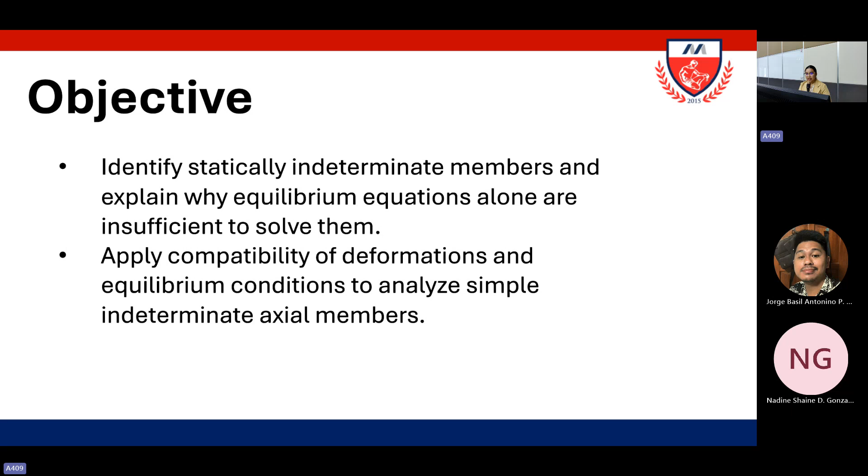So ma'am, what is a statically indeterminate member? When the reactive forces or the internal resisting forces over a cross-section exceed the number of independent equations of equilibrium, the structure is called statically indeterminate. These cases require the use of additional relations that depend on the elastic deformations in the members.

Usually, most commonly, you will know if it's a statically indeterminate member if you have two materials in your body. In our previous lessons, we only analyzed one material, right? For example, in one of our examples, we analyzed a steel rod. What material was used there? It is pure steel. In other examples, you can also analyze using pure cast iron.

For example, we have here a steel rod, and this is applied to a load P. What is the reaction of our material? It will resist the applied load. So if this is the applied load, how will our material resist it?

For example, let's cut here to reveal the internal force. If you have a compressive load P, how will the material resist it? If this is a downward force, what force should be here so that it will be in equilibrium? Upward force, right? And since this is just one material, meaning only one force will resist it.

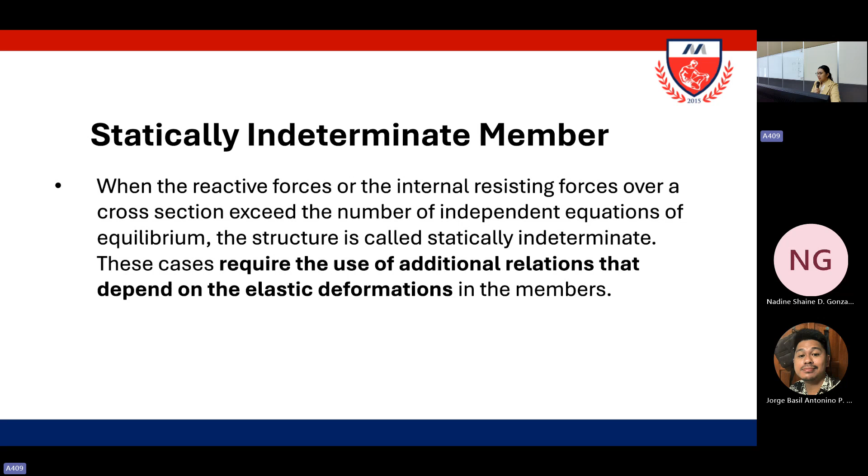And when you have a statically indeterminate member, usually you use equations based on their elastic deformation. So to better understand this, we will go through our example right away.

Example 1: a steel bar 50 mm in diameter and 2 meters long is surrounded by a shell of cast iron 5 mm thick. So this is our steel bar that is 50 mm in diameter and 2 meters long — when you convert 2 meters into mm, that would be 2,000 mm. It is surrounded by a shell of cast iron 5 mm thick, so the covering is made of cast iron, and the inside of the cylinder is made of steel. Compute the load that will compress the combined bar a total of 0.8 mm in a length of 2 meters. For steel, E equals 200 GPa, and for cast iron, E equals 100 GPa.

So what is our E? The modulus of elasticity, correct?

So, what are our given values?

First, why is this a statically indeterminate member? Because it's a composite axial member, meaning may dalawang materials, a steel core inside a cast iron tube carrying one load P, it is a statically indeterminate member. So the unknown internal forces are the load shares in each material, the force from the steel, and the force from the cast iron. So bale yung applied force mo na P, yung nasa taas, paghahatian yan ng ating steel tsaka ng ating cast iron. Nagets ba yon?

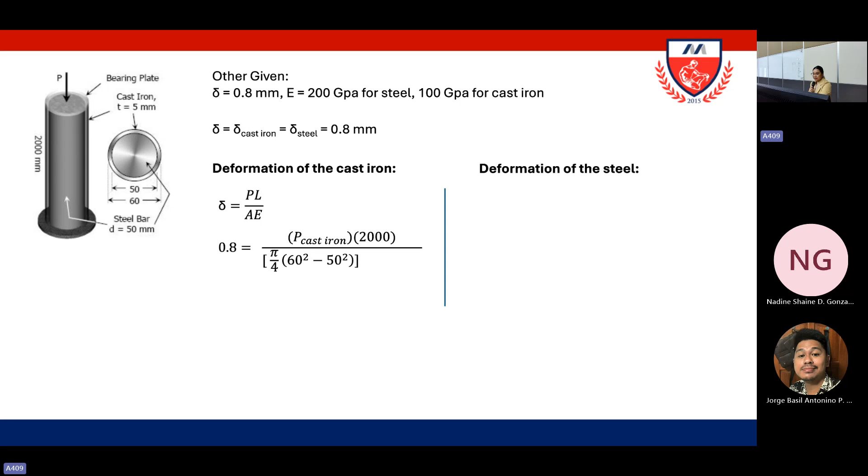And our area of the cast iron, that is pi over 4 times 60 squared minus 50 squared. So ma'am, bakit ganyan yung area natin? Sulat ko sa board, okay?

Yung shell natin is cast iron, tapos ito is steel. Yung outer diameter mo daw is 60, tapos yung inner diameter is 50. Can you still recall what is the formula of area of a circle?

Pi over 4 d squared. Yung cast iron natin, yung nasa labas. So can we say that the area of our cast iron is pi over 4 times 60 squared? No. Kasi kapag ito yung ginamit mo, meaning ang area niyan is itong buong circle. Gets ba? So ano lang ba yung cast iron natin? Ito lang, itong area na to, right?

Therefore, yung gawin natin is dapat yung area ng buong circle minus yung area ng smaller circle, which is yung steel. So that would be yung area ng ating cast iron. Ano yung area ng ating buong circle? That is pi over 4 times 60 squared. Minus, ano yung area ng ating smaller circle or yung area ng steel? Pi over 4 times 50 squared. So dyan galing yung area natin.

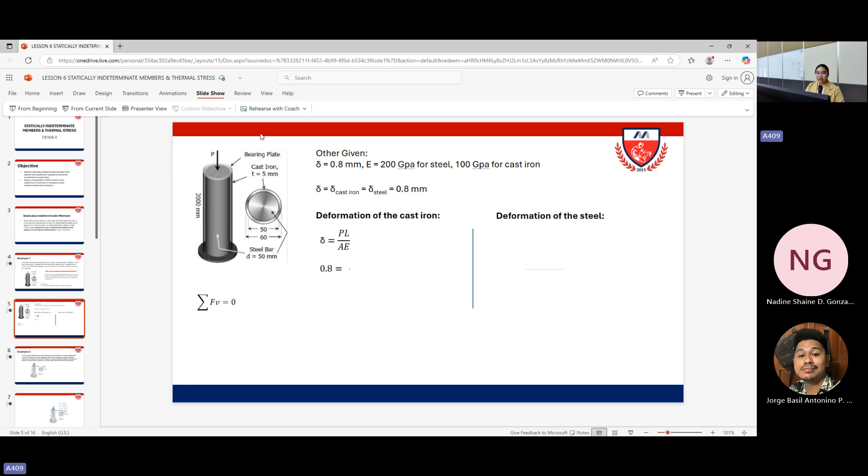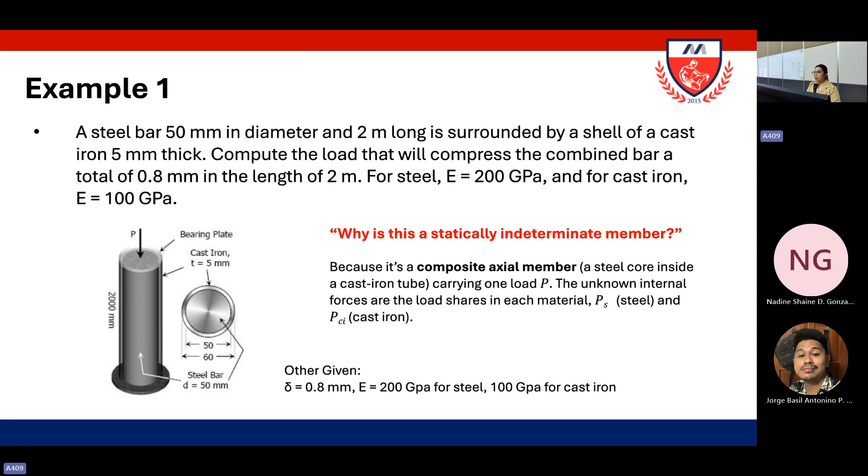Ano nga ulit yung hinahanap natin sa problem? That is... pakita ko na lang yung first slide ha, tapos picturean niyo na lang. Yung hinahanap is compute the load that will compress the combined bar. So yung hinahanap is yung total force.

So if may force na tayo ng cast iron, tsaka may force na tayo ng steel, paano natin makukuha yung ating total force? Based from the concept na pinaghahatian ng cast iron tsaka steel yung inyong force P, we can do summation of forces vertical.

So, meron tayong force P na pababa. And then, meron tayong pataas na force ng cast iron, tsaka pataas rin na force ng steel. Bakit na pataas? Kasi kailangan niyang i-resist yung pababa na force. So if you have P, so meaning that would be P equals to the force of the cast iron plus the force of the steel.

So ilan yon? You just substitute. You have 11,000 pi plus 50,000 pi, or you will get 61,000 pi newtons. And if convert nyo into decimal form, that would be 191.64 kilonewtons. Na-try niyo ba sa calculator?

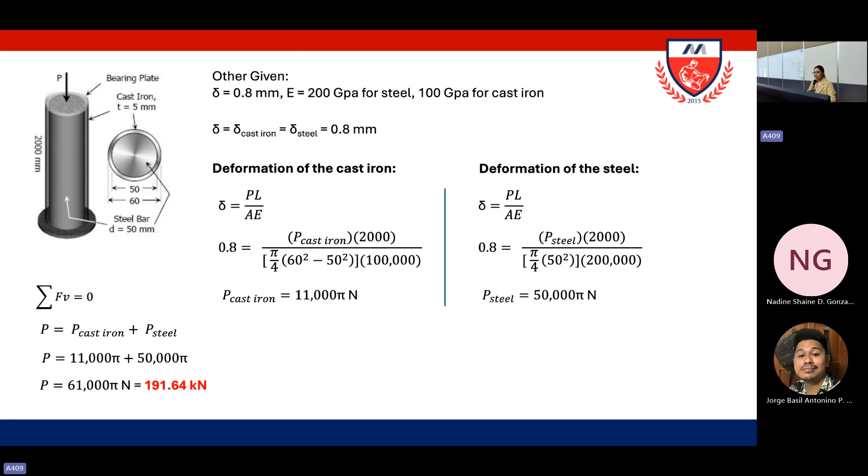So if there are no questions, let's proceed to the next example. Example 2, a steel cylinder with 300 mm outside diameter and wall thickness of 20 mm.

Yung outside diameter natin is 300 mm. Tapos yung wall thickness, since ito yung wall ng ating cylinder, the thickness of that is 20 mm. It is filled with concrete.

So if it is filled with concrete, ano yung ating outside covering? It is made of steel. Tapos yung nasa loob is made of concrete. So is it a statically indeterminate member?

Yes, because it is a composite axial member. So it is used as a pier to support an axial load in compression. Ito yung ating axial load. It is in compression again because kino-compress niya yung ating material.

So if the allowable stresses are 140 MPa for steel and 12 MPa for concrete, and if the modulus of elasticity for steel is 200 GPa and for concrete is 19.2 GPa, what is the allowable load for the pier?

So ito lang yung hinahanap natin, yung force P. Ano ba yung forces again na magre-resist sa force P na ito? Meron tayo pataas, right? Ilang forces yung magre-resist na pataas? Dalawa. The other force is from the concrete and the other force is from the steel.

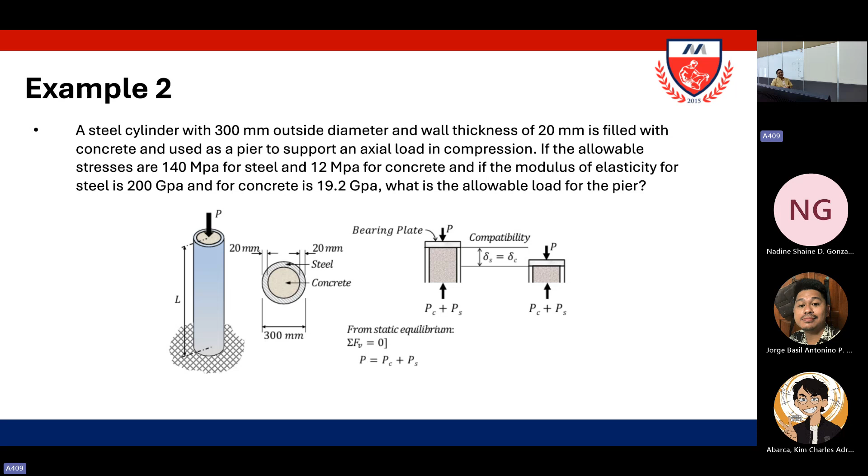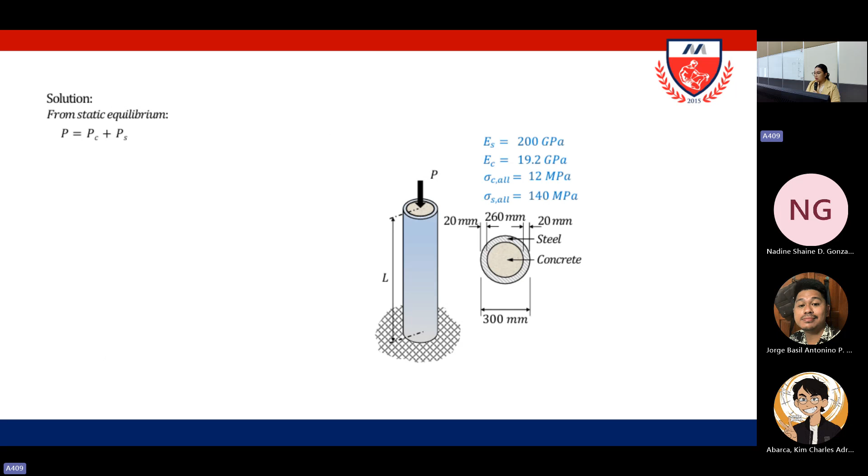Okay, so ito lang yung given natin kanina. Meron tayong modulus of elasticity ng steel tsaka ng concrete. Tapos yung allowable stress ng ating concrete is 12 MPa. And yung allowable stress ng ating steel is 140 MPa. So solution again is P equals PC plus PS. And then that would be stress times area.

I know it is confusing. Paano naging stress times area? Meron tayong PC plus. What is the formula of our stress? Stress is P over A. So if you derive mo from here, if we cross multiply mo yan, that would be P is equal to stress times area. Gets ba?

Therefore, if meron tayong force from the concrete, dapat stress times area yung force, di ba? Pero since this is force from the concrete, dapat yung stress natin is sa concrete and then yung area natin is sa concrete also. And if sa steel naman, dapat yung stress is from the steel and yung area is from the steel.

You take note of that, ha?

So let's solve for the area of the concrete. So that is pi over 4 times 260 squared. Ma'am, bakit 260? Bakit hindi 300? Kasi yung concrete natin is yung inner circle. Therefore, we use the inner diameter. That would be 53,092.92 mm squared. And yung area naman ng ating steel is pi over 4 times 300 squared minus 260 squared. That means yung total area ng inyong bigger circle, i-minus nyo lang sa area ng inyong inner circle. You will get 17,592.92.

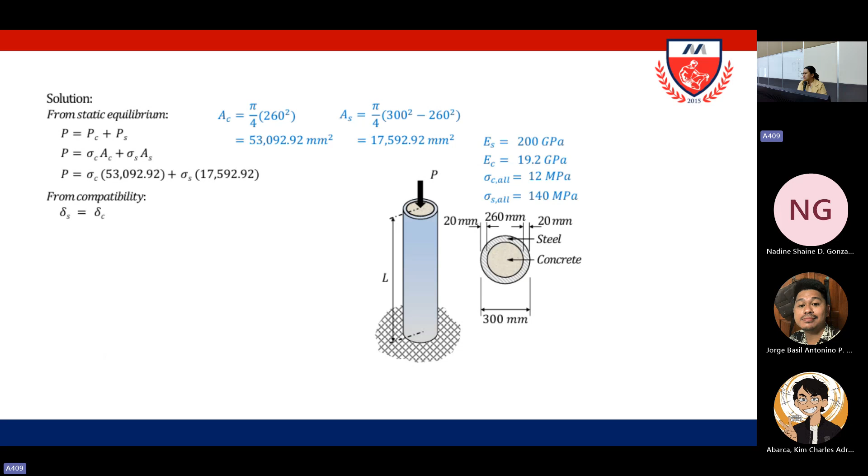From compatibility, deformation of the steel is equal to deformation of the concrete. What formula should we use? Can we use strain equals deformation over length? No, because there's no given strain. So we will use PL over AE, which reduces to just P over A.

So therefore, you can write it as stress times length over E, since P over A is actually stress. That would be equal to stress times length over E. Did you get it?

If you got it, let's proceed. Substitute the E of your steel and concrete. Again, you cannot substitute the stress values simultaneously because they don't fail at the same time. Doing cross multiplication, you will get stress of steel equals 200 times stress of concrete over 19.2. Does everyone know how to cross multiply? Okay, cross multiply that.

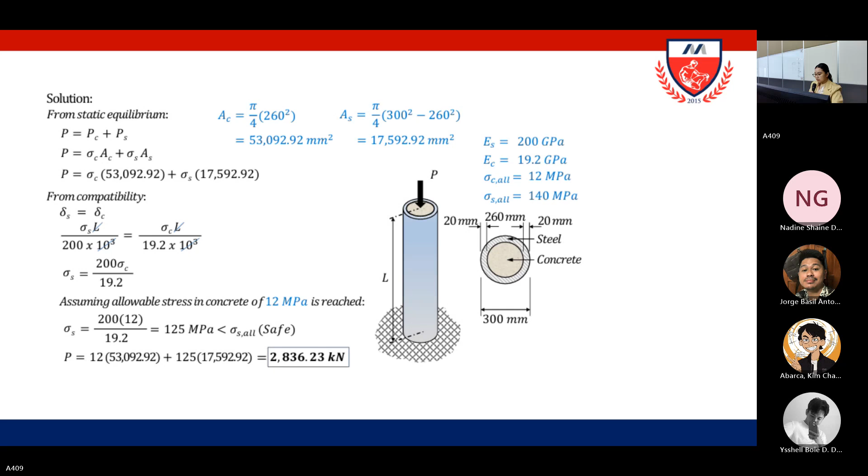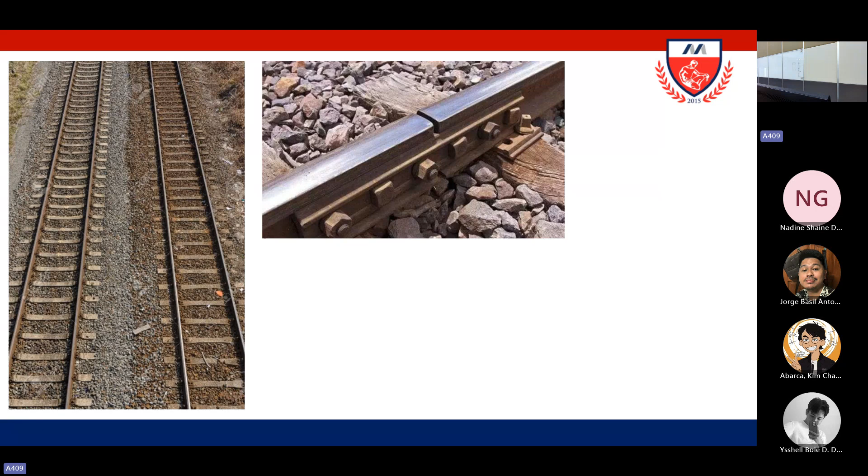If you zoom in, it looks like this. What do you see in the picture? It has a gap, right? The steel has a gap. So why is there a need for a gap? Our question would be, why is there a gap? There is a gap because steel expands in hot weather and contracts in cold weather.

So when it's too hot, our steel expands. When it's too cold, it contracts. That's why you see small gaps - those are called expansion joints between rails, because without them, the rails would bend or buckle when they expand.

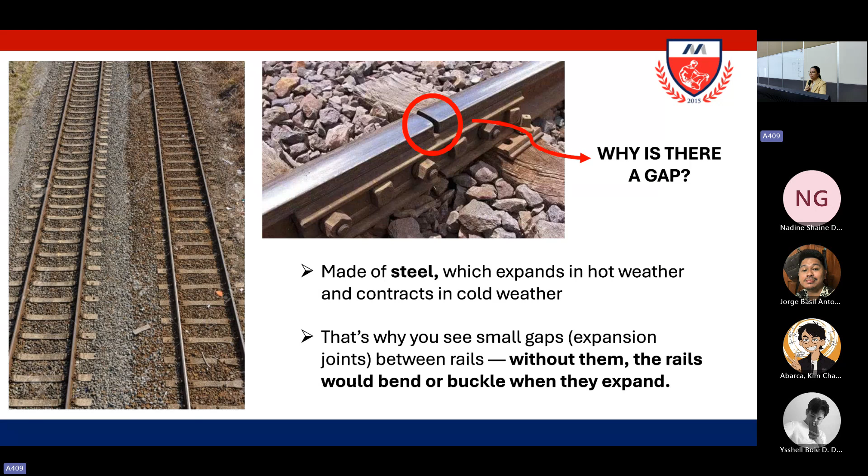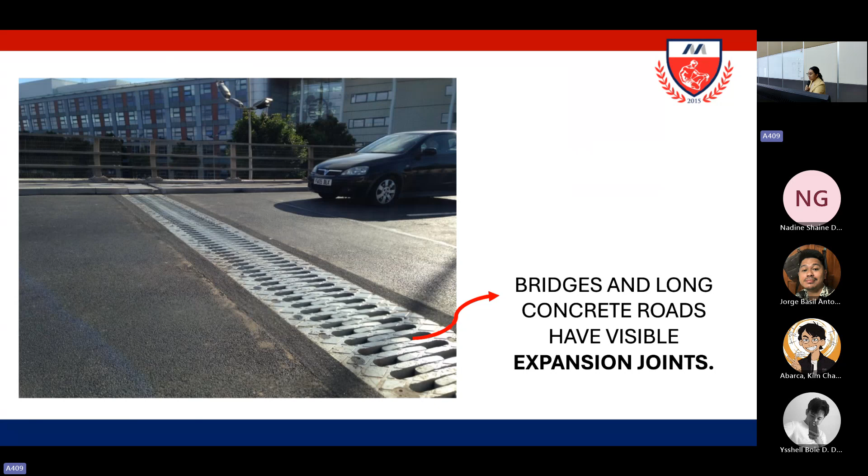That's what you call the expansion joints. So bridges and long concrete roads have visible expansion joints. These are intentional gaps to allow expansion and contraction of materials due to temperature changes, preventing cracks or warping.

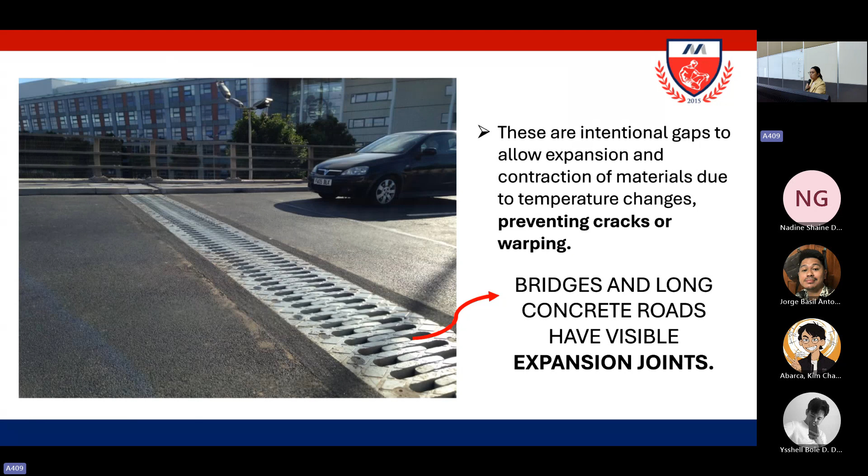Kasi kapag masyadong mainit, kasi yung road natin exposed siya sa weather, right? Umuulan, umiinit, lumalamig. Therefore, kapag palaging ganun na walang expansion joint, eventually magka-crack siya or what you call warping. So yung warping is parang ganito siya. Familiar, no? Marami tayong ganyan dito kasi wala tayong expansion joints.

So that's what you call your thermal deformation. Kasi from your weather affects your material, it will deform. So temperature changes causes the body to expand or contract.

The amount delta T or deformation due to temperature, the formula would be your coefficient of thermal expansion, times the length times the final temperature minus initial temperature. Or you can write it as coefficient of thermal expansion times length times change in temperature.

Kung ako sa inyo, para mas madali niyo siyang ma-memorize, yung i-memorize niyo dyan is yung nakasulat na final formula. Kapag binasa niyo, paano niyo yan babasahin? Alat, right? And then substitute niyo lang yung change in temperature, meaning final temperature minus initial temperature.

So yung unit ng ating coefficient of thermal expansion is in meter per meter degree Celsius. And length is in meter, and TI and TF, or our temperature, are in degree Celsius. So yung length nyo, pwede namang in mm as long as yung deformation nyo is also in mm. So if yung deformation nyo is in meters, dapat yung length nyo is also in meters.

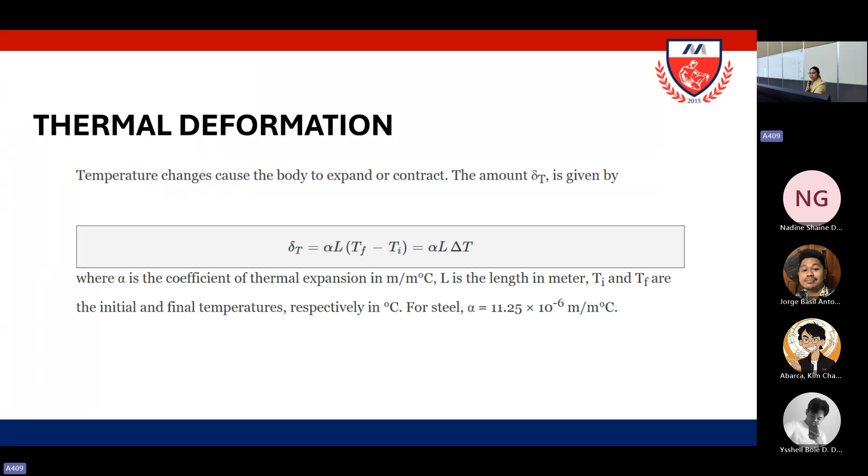So let's have our example. An aluminum power line cable is 100 meters long at 25 degrees Celsius. During a hot summer day, the temperature rises to 45 degrees Celsius. How much longer will the cable become? Coefficient of linear expansion of aluminum is 23 times 10 raised to negative 6.

Bali yan, per degree Celsius yan ha, per degree Celsius. Bali na-cancel kasi meter per meter degree Celsius yun, right? Bali parang na-cancel lang yung meter over meter.

Ano yung given natin? We have a length of 100 meters. And then yung initial temperature na 25. And then ano yung final temperature? That is 45. So hindi nyo naman siguro ma-exchange yan, right? Kasi sabi sa problem, the temperature rise to 45 degrees Celsius. Therefore, yung 45 mo is yung final temperature.

Ano pa yung given? We have the coefficient of thermal expansion. And then ano yung hinahanap natin? The new length of the cable. So paano natin i-approach yung ating problem?

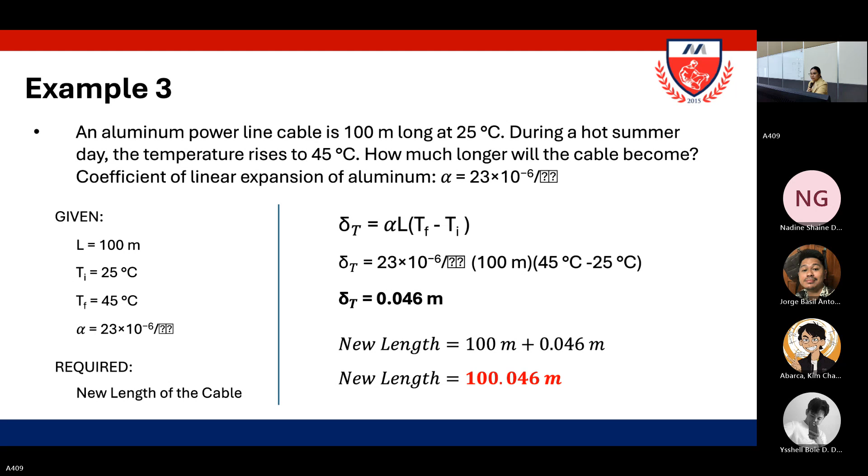Sige. If walang questions, let's proceed to thermal stress. So if temperature deformation is permitted to occur freely, no load or stress will be induced, blah blah blah. Mahirap intindihin, right? Yung first paragraph. So break down ko na siya para sa inyo. That first paragraph just means that when a material heats up or cools down, it expands or contracts.

So kapag masyadong mainit, yung material nyo nag-expand. Tapos kapag masyadong malamig naman, yung material nyo nag-contract. So if the material is free to move, then it just changes size without developing any stress. But if it is restricted and cannot expand or contract, then the material develops internal stress, and that's what you call the thermal stress. So explain ko yung concept ha.

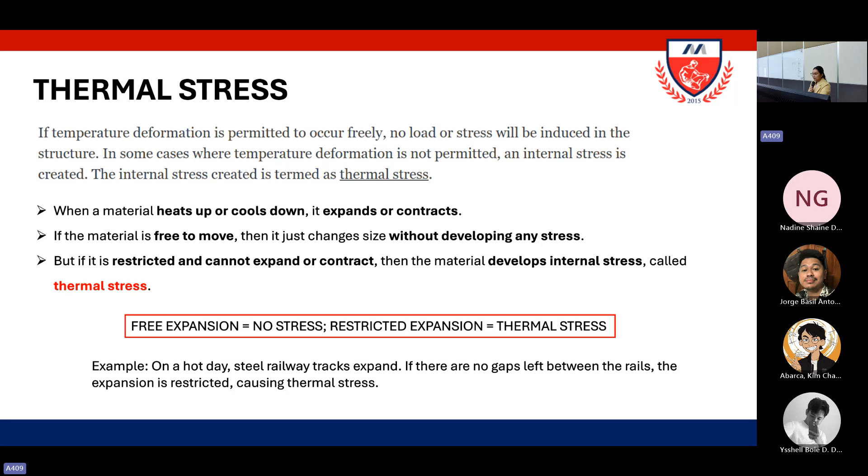So this will be our last example. Steel railroad rails 10 meters long are laid with a clearance of 3 mm at a temperature of 15 degrees Celsius. The modulus of elasticity is 200 GPa and the coefficient of linear expansion is 11.7 times 10 raised to negative 6 per degree Celsius. First question, at what temperature will the rails just touch? Second question, determine the stress in the rails at 65 degrees Celsius.

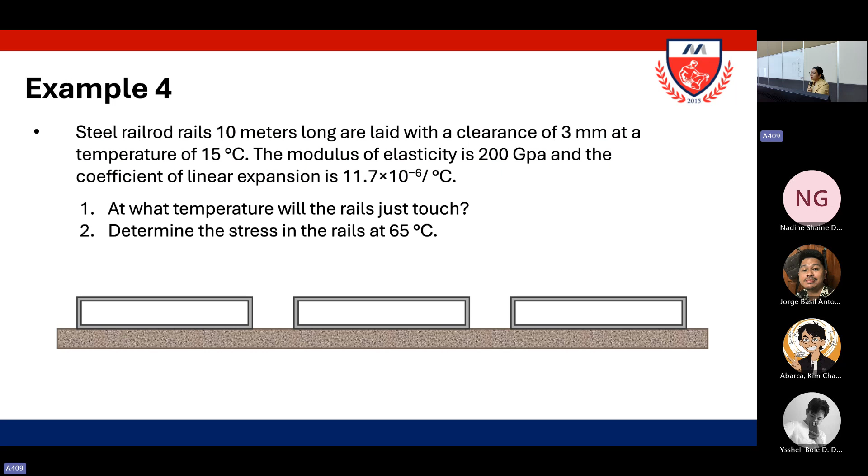Ano yung given natin? For example, ito yung ground mo, meron ka steel rails. Imagine nyo na lang na yan yung steel rails mo, that is 10 meters long, or in mm, that would be 10,000 mm. And then meron daw clearance na, ilan yung clearance natin? 3 mm at a temperature of 15 degrees Celsius.

So yan yung 3 mm mo, ganyan yung clearance niya kapag yung temperature is 15 degrees Celsius. So let's say for example, nag-increase yung temperature mo ng 20. Anong nangyayari kapag nag-i-increase yung temperature? Nag-e-expand yung material. So while nag-i-increase yung temperature mo, kapag umiinit, nag-e-expand din siya until such time na mag-touch siya sa kabilang rail. So yan yung question number 1.

At what temperature will the rails just touch? So nung nag-touch na siya dito, ano raw yung temperature niya? Kapag nag-touch lang siya dito, nakaka-experience ba siya ng stress? Imagine yung kamay nyo, ganyan nyo, may ma-experience ba kayong parang ma-feel na stress? No, right? Compared sa parang ipilit nyo siya, meron na siyang stress. So if nag-touch lang yung rails, our stress would be approximately 0.

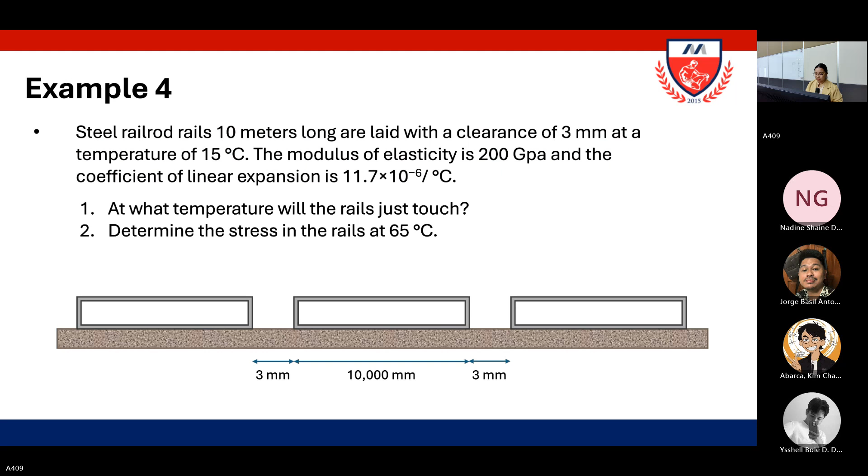Meron tayong steel rails, and ito yung given natin. The question is at what temperature? So kapag uminit, mag-expand siya until such time na nag-touch na yung ating steel rails. Ano yung ibang given natin? Meron tayong length na 10 meters. Yung deformation due to temperature is 3 mm.

Kasi yan yung, so bakit 3 mm? Do you agree na, di ba yung previous image natin kanina, may space siya dito, tapos may space siya dito. Paano ba yung expansion niya? At one side lang ba? Two sides. Tapos ito, mag-expand din siya ng paganon. So if meron kang steel rail dito, ano yung in-expand niya dito na side? That is 1.5, kasi ito katabi niya, nag-expand din ng 1.5. Tapos ito, meron ka rin 1.5, 1.5. Therefore, if you add 1.5 plus 1.5, that would be 3 mm.

Our initial temperature is 15 degrees Celsius, and then we have a modulus of elasticity of 200,000 MPa. Our coefficient of linear expansion is 11.7 times 10 raised to negative 6. And ano yung hinahanap natin? The final temperature, correct. So what formula will we use? ALAT, that would be alpha L times change in temperature, or final temperature minus initial temperature. May given na ba tayong values niyan?

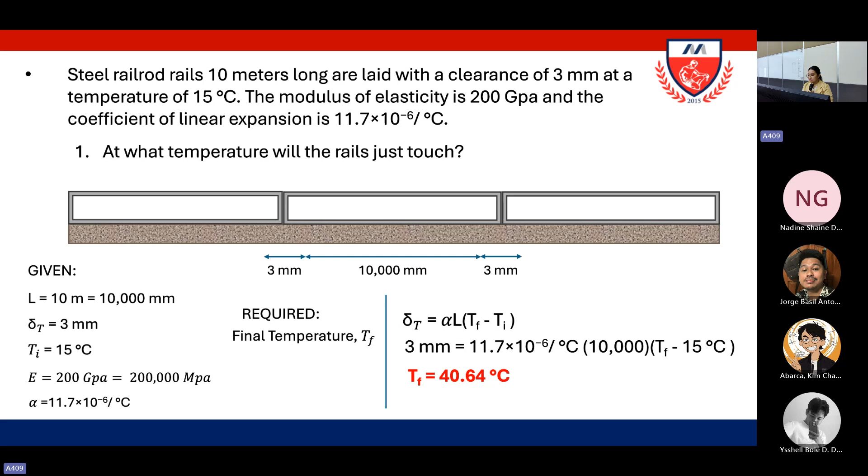So second question is determine the stress in the rails at 65 degree Celsius. So ano yung temperature natin kanina nung nag-touch lang siya? 40.64.

So meaning kapag 65 degrees Celsius na siya, imagine nyo ulit ganito yung kamay nyo. Kung 65 degrees Celsius na siya, mas mag-push na siya towards each other. And kapag masyado siyang nag-push towards each other, maka-feel ka na ng stress. That's why merong stress if the temperature is 65 degree Celsius.

So example, yan yung steel rails mo. Kapag nag-touch lang siya, the temperature is 40.64. Kapag sumobra na sa 40.64, ang nangyayari is nagtetend na mag-push towards each other yung rails mo. Pag ganyan, right?

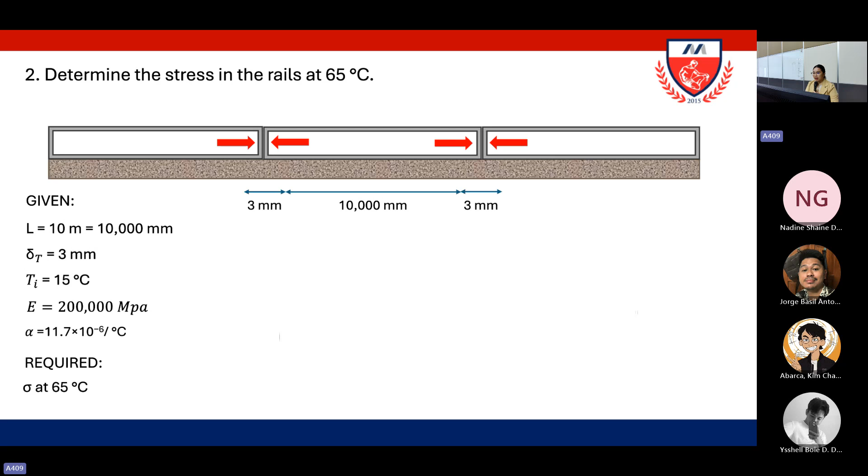So yan yung given natin. Tapos yung required is the stress at 65 degree Celsius. Ito ulit yung ating formula. And then, may stress ba tayo dyan? Wala, di ba? Paano natin makukuha yung stress?

We derive. So if i-derive natin, ano yung deformation natin na formula? We can use PL over AE equal to alat. And then, kagaya sa ginawa natin kanina, ano yung P over A? Pwede mo yung i-separate, di ba? That would be P over A times L over E.

Then yung P over A natin is the stress times L over E. So meron ka ng stress. So would it be possible to solve our stress already? Yes, kasi meron ka ng stress sa iyong formula. Pero meron ba tayong makakancel dyan? Kasi meron kang length sa left side, tsaka meron kang length sa right side, pwede mo niyang i-cancel yung length natin. So that would be stress over E equals coefficient of thermal expansion times change in temperature. So cross-multiplying, you will get stress equals modulus of elasticity times coefficient times change in temperature. Naka-follow ba sa pag-derive ng formula?